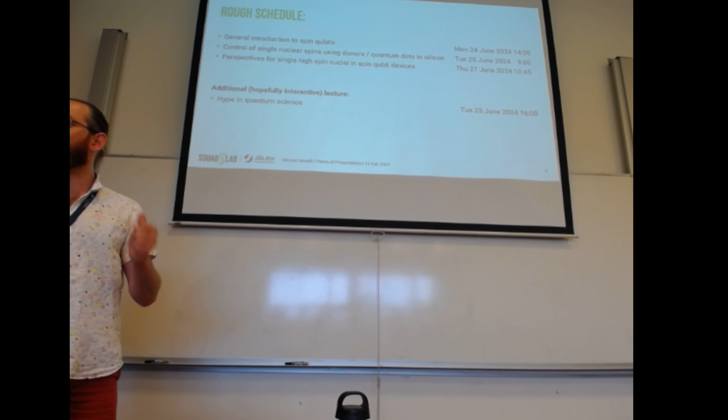The topic is the sequel of what Sergei Frolov showed you before from the experimental perspective. I want to talk more about the hype aspect and how that can generate potentially unreliable scientific papers, what that means for our community, and what we can do to improve our practices. Of course, I don't know all the truths either, so it's really a discussion where I set the stage. It's the last talk of the day, so it won't be very technical, more meant to discuss our practices.

Having said all that, let's start. This is derived from a block of lectures in the master's course at RWTH Aachen, taught for many years by Thomas Schäpers, an experimental professor in Jülich and Aachen. I started co-teaching this course with him last year, and I think this is a good deck of slides to talk about spin qubits. Any questions, interrupt and ask. This is supposed to be fairly basic, so I hope that you all can follow.

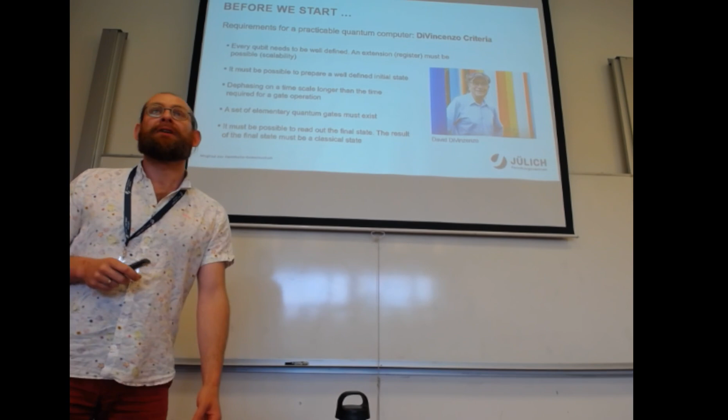So to start, David is actually one of my current bosses until he retires later this year. I'm sure that if you work with qubits, you have heard of the DiVincenzo criteria. It is basically an essay-style paper where he lists a number of criteria that any working quantum computer should obey. It's fairly generic, not very mathematical. You need a well-defined qubit. You need to make many of these qubits. You need to be able to initialize such a qubit. Then it needs to stay coherent on a time scale much longer than it takes you to operate on the qubit.

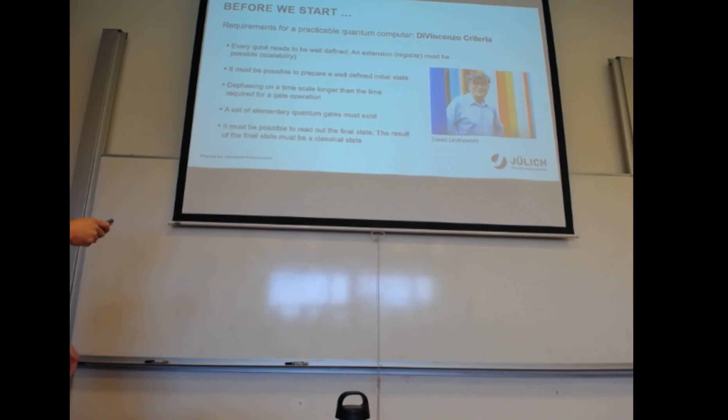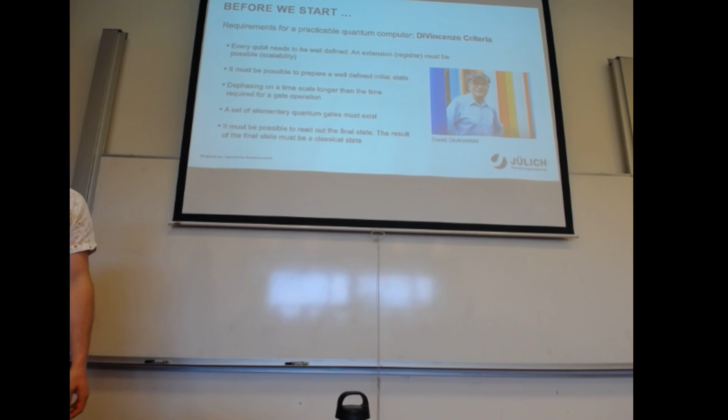Of course, you need to be able to define those operations, so not only initialization, but also changing the state in a controlled manner, and readout. In practice, I would say that readout and initialization is almost the same thing in many instances. So, yeah. I think from today's perspective, this is a very easy to understand and logical set of criteria that we need. But back in the late 90s, I think this was quite eye-opening to many people to see this spelled out.

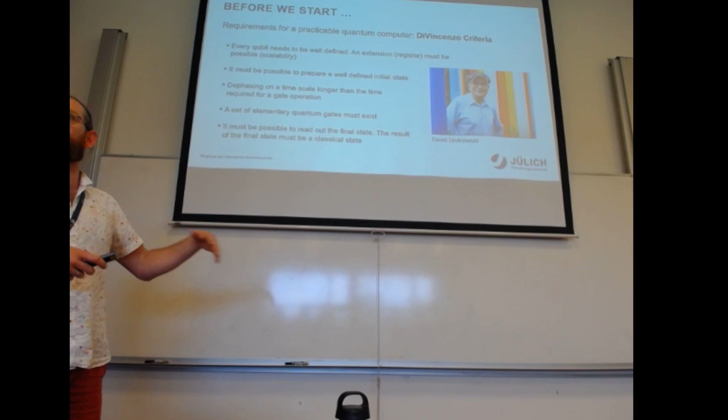And the point of the presentation today is basically to go through how a spin qubit works and see how we meet each one of these criteria. I won't make it explicit, but it should be quite clear, I think, throughout. All right? So, spin qubits.

It all starts, I would say, I will follow the history of the field a little bit, and that means we need to start talking about semiconductor heterostructures. Because spin qubits really originate from material science in the 60s, 70s, 80s, etc. And then in the 90s, this was perfected to the point you could make spin qubits from it in the early 2000s.

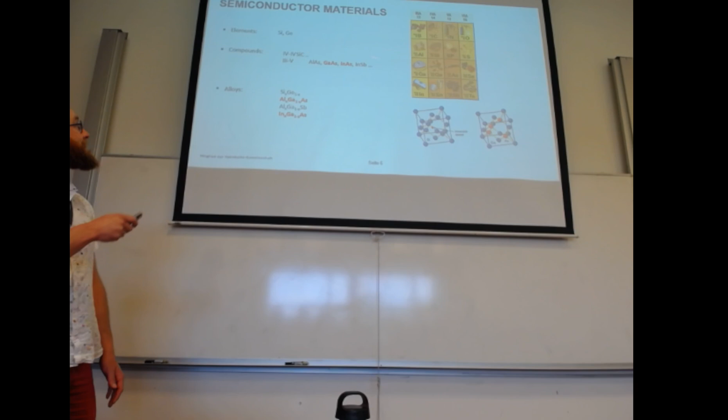So if we look at the periodic table, we're going to look for semiconducting materials where we can use the typical framework of gates, dielectrics, etc. to make gate-defined electrically controllable devices. What are the most attractive candidates for that? Of course, we have the group 4 elements, silicon and germanium. Very well known in the semiconducting industry. Also very attractive candidate systems for spin qubits. Nowadays, these are the leading materials and alloys of it.

Back in the days, it was actually not at all this platform where spin qubits were developed. Instead, it was from compounds and mixtures of that, namely aluminium gallium arsenide and gallium arsenide. So III-Vs. III-Vs have historically been a very important platform for spin qubits. Nowadays, I would say it's slowly phasing out. I can already tell you the reasons. It's nuclear spins in the material that you cannot get rid of. I will talk a little bit more about it later on.

What is the criteria for the elements to be a platform for the... I will hopefully answer it in a few slides, but mostly practical constraints. Is the material available? Can you grow it? And then can you fabricate electric devices on top of it that allow you to control the density in the material? Okay, so there's no criteria for the intrinsic properties?

No, not really. By now, for example, we know that you don't want a material that has nuclear spins that you cannot get rid of. But that is not a truly fundamental criterion. It limits your performance at some stage, but it's totally possible to work in a material with nuclear spins.

So this is not a fully comprehensive list. I am expecting that in 1 or 2 years there will be a spin qubit in graphene. Graphene is not so scalable, so it may not be the most useful, but we will get it. There have been spin qubits in carbon nanotubes. Any semiconductor you can shape into an electronic device and control the density of, in principle, suffices.

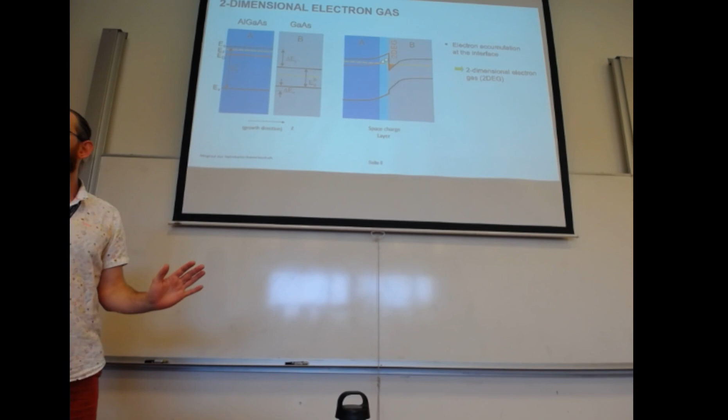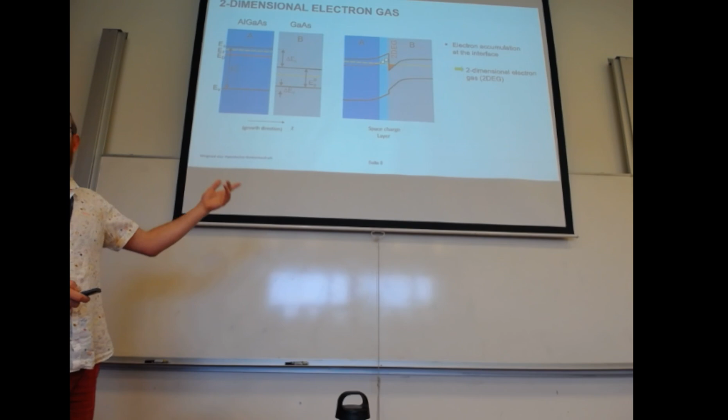This material system has been extremely important in condensed matter physics. It was developed in the 1980s to the point where you could make nice quantum transport devices out of it, and many major discoveries have been made based on this material platform. New discoveries in quantum Hall effect, quantum point contacts, etc. But also the first spin qubits were made in this material platform. It took another 15 years almost, early 2000s, before people could make spin qubits in this material. So many of the results I will show throughout the talk are based on this material platform.

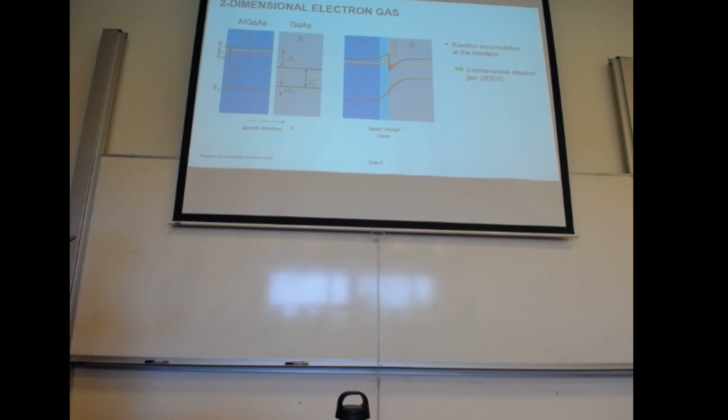One of the major tweaks that people had to do was put a remote dopant layer, and that's sort of like a lot of material optimization and investigations went on here. And this resulted in the end that if you look at the bulk of gallium arsenide versus this, called a two-dimensional electron gas because it's in a two-dimensional plane, you can see that as this material was optimized and improved, people were able to get very high mobilities.

So mobility basically means here that these electrons behave fairly ballistic. Mean free paths are of the order of micrometers, and that is important because now you enter the lithographic scales that were getting more and more accessible in the late 80s, 90s. Okay? So this is now two-dimensional. So we have basically gone from 3 dimensions to 2 dimensions, but we need to end up with a 0-dimensional object, a fully confined electron.

Yeah? Sorry, why is high mobility important when I'm doing a qubit? Because when I'm doing a qubit, the electron should rest. So what we need is to be able to have a well-defined, phase-coherent standing wave within our confinement potential. That is what you need from the material, and that you get through getting a high mobility. Basically, low mobility means that your electron is scattering all the time, that it's hard to get a properly confined standing wave within your confinement potential.

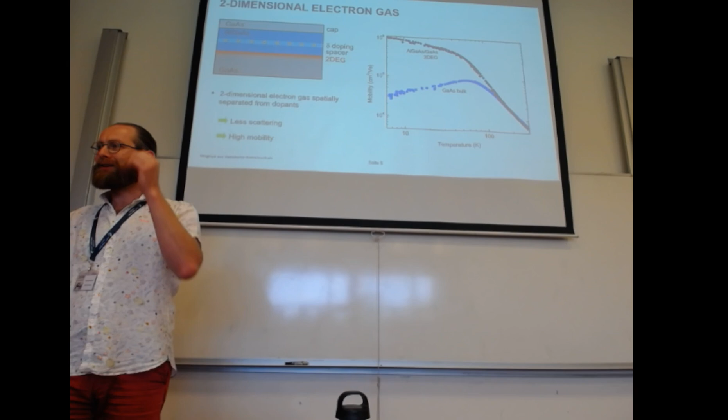This was a major problem with silicon for a long time. It was basically too disordered, too low mobility. So from an experimental viewpoint, we equate in our minds low mobility with very disordered, and high mobility with not so disordered, where you can have phase-coherent physics going on. So this was why this mobility had to be pushed to the level of at least 10 to the 5 or so before people could start confining electrons to the point you can see quantum effects.

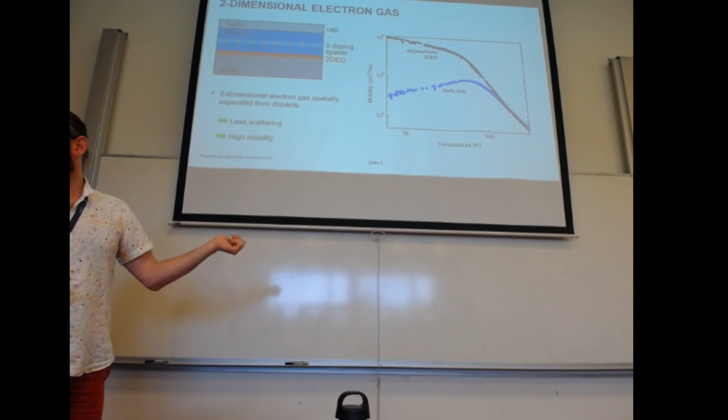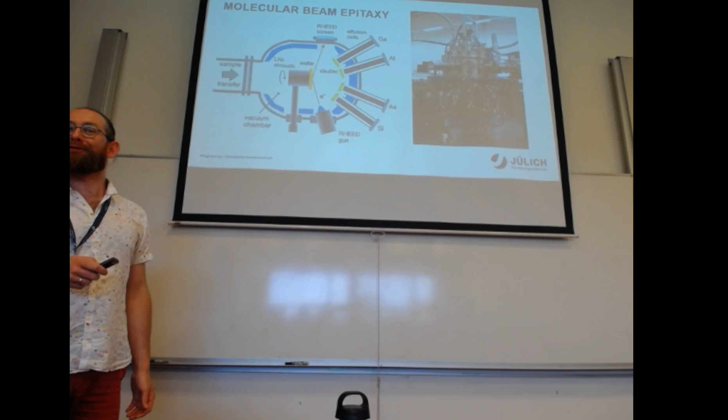Yeah. It's a big material problem, I would say. We're looking here at decades of materials research. Very impressive what material growers actually have achieved. This material, aluminium gallium arsenide, is made in MBE systems, molecular beam epitaxy. I'm no expert on that. I'm a device physicist, so I don't know all the ins and outs myself either, but you can see these are very complex chambers with several sources. You have analysis tools on there, often heating or cooling depending on the type of material. This needs to be ultra high vacuum, and this takes typically years of optimization for a lab to get it to the point where they can produce high quality materials.

And that is in our community how we often operate. There is an institute or a group that can make the perfect material for our purposes, and then teams like my own, people like myself, collaborate with the growers to make electronic devices out of that. So we ask them for material, sometimes we give input on how exactly they should grow the layer stack, etc. All right.

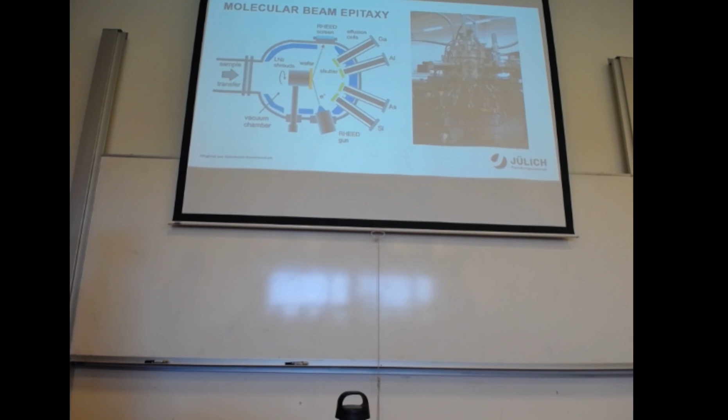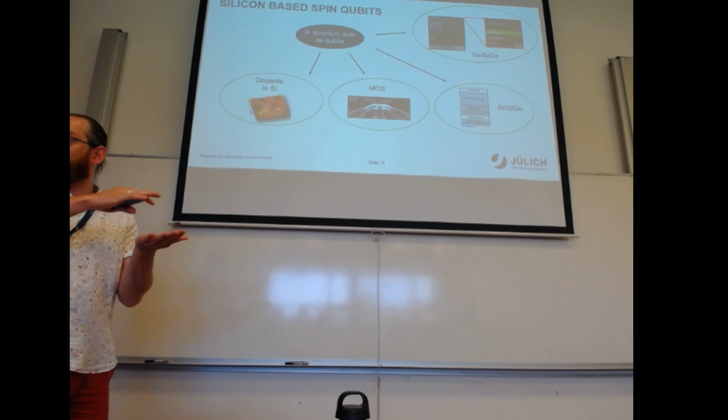And I will talk about it at the end, there are of course by now alternatives, to the point that gallium arsenide has been phased out, mostly for spin qubit research. Still some things are being tried there, but by now it's mostly overtaken by silicon-based materials that can either be bulk silicon with dopants in it, where you use the single dopant as a spin qubit. It can be really transistor-like objects, so metal oxide semiconductor type structures on top of the silicon, and you work at the silicon-silicon oxide interface.

Or, and it's probably the leading contender at the moment, having another heterostructure where you use an alloy of silicon germanium, and in between it you have this very strained silicon quantum well. So you start from a regular silicon substrate, you have a buffer layer, and you end with, in this case quite deep, a thin 10, 50 nanometer thick silicon layer that is now strained because there's germanium mixed in the silicon above and below it. The lattice constant is slightly changed, and the silicon here is now strained, and that is a way to crank up the mobility a lot actually, and also remove degeneracies in the band structure. I will come to that at the end.

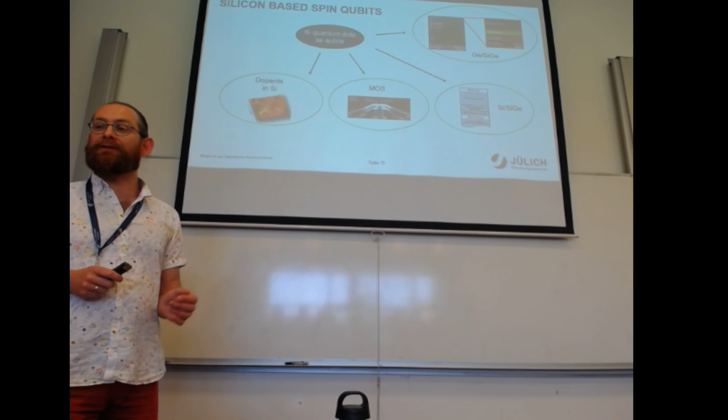The counterpart has been popular for the last 4 or 5 years or so. That is using germanium. So instead of high concentration of silicon, you have now a high concentration of germanium. You use a pure strained germanium quantum well. That is a hole conductor, so we work in the valence band here. I would say the experimental progress in the last 5 years is quite impressive, and that is the main platform we work on in my own team.

All right? This just as a pretext. The main workhorse structure or device that we need to talk about and consider is the quantum dot in a semiconductor.

So the way this works is we already, through material growth and by working at interfaces, etc., we manage to confine our electrons from 3D to 2D and basically engineer their properties to the point that they become more suitable for this type of research. But that's not enough. We want full confinement, where we have really created a particle-in-the-box-like state where only a single electron or a countable number of electrons can be present.

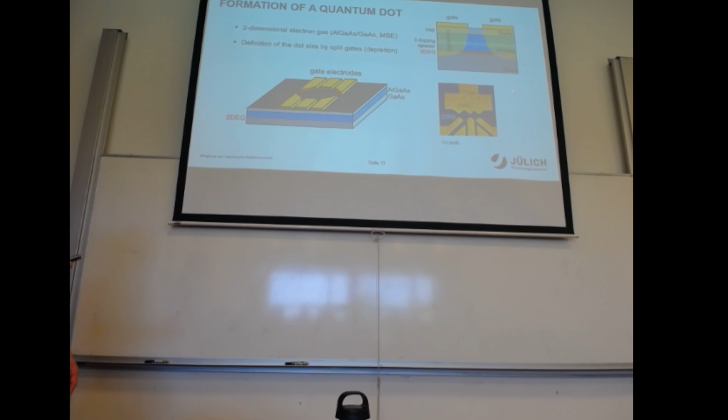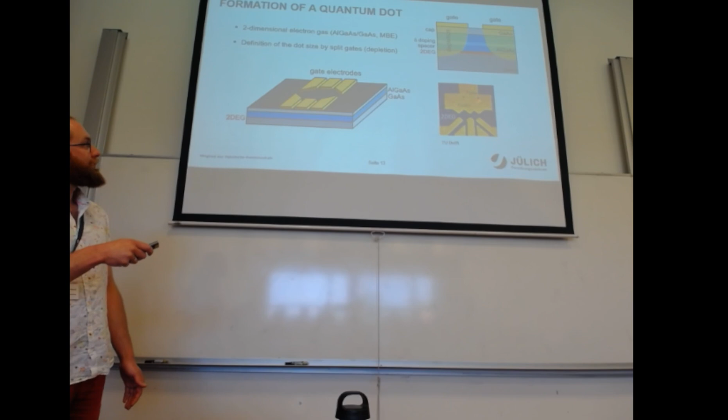In this case, they worked through depletion, meaning that through the design of the material, the two-dimensional electron gas is already present at 0 gate voltage, and instead you need to push it away where you put the gates. So you can see that in all the area here where there is no gate, you can have electrons, and underneath the gold gates here there are no electrons. So here you are putting a negative voltage on all these gates to push electrons away, and this is your confinement. Right?

And this is another example from Japan, from NTT. Similar idea. Also in the depletion mode.

Okay. Now, what have we generated here? And that is, I would say, a surprisingly effective, almost classical model, and it is looking at the charging energy of a tiny capacitor. And for much of the work we do in spin qubit land, this is pretty much the only model you need to work with, with small corrections for quantum effects.

So, schematically, we have a source and a drain, to talk in transistor language, so we have charge reservoirs here, and in the middle we have a small puddle. That of course is a small metallic-like island with a capacitance. Now, the capacitance of this island, we can calculate that, and it comes with an energy, and that is what we call the charging energy.

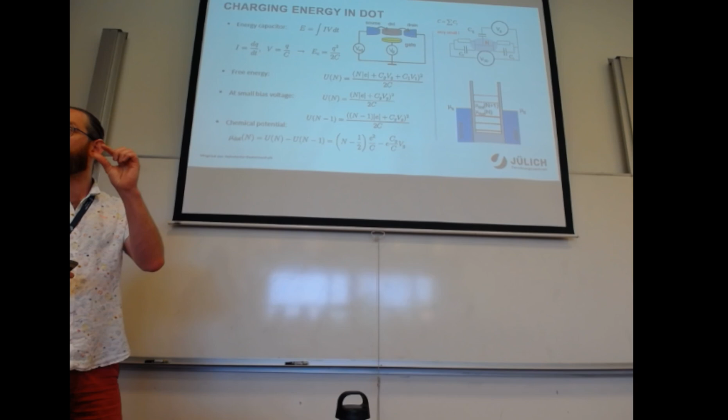Okay? So, very basic derivation, and we end up with the charge on the island squared divided by the capacitance. And the point is that when you make this island very small, the capacitance gets very small as well, and because it's in the denominator, the charging energy gets large. And it turns out that with the lithographic techniques that are available, you end up with an energy scale that is visible in the laboratory. And this is all classical, of course.

The other important aspect to understand is that this leads to a discretization already in the available energy states of this island. This is all classical, there's no quantum in here. And the reason is that every time you put an extra electron on this small island, you need to pay this charging energy, and once this is more than the thermal energy of your system, you will have only a discrete range of energy states available for your island.

So in terms of chemical potential, which is the typical thing we work with in the laboratory, because we can adjust the voltage difference across the device. What this means is that for the various different states, this is basic math, taking these capacitors in the circuit into account, we can define an arbitrary number n of states, and then the difference between two of these states is the chemical potential of the island, or the dot. And then you get, again, this expression in there that contains the charging energy.

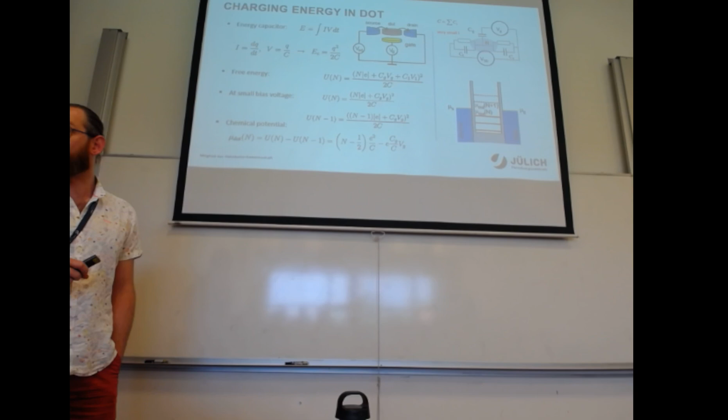So what this means is that we have a ladder of possible chemical potential states now of the island. And every time one sits in between the source and drain chemical potential, we can have transport through the device, but when there is no level in between, we are blocked. So from a device operational perspective, this is something you can observe.

Okay? So, if you now look at the difference in chemical potential between two of these states, you will find that there is the charging energy in there. Okay? So it all is about making the island small enough compared to the effective temperature of your system so that this quantity becomes observable.

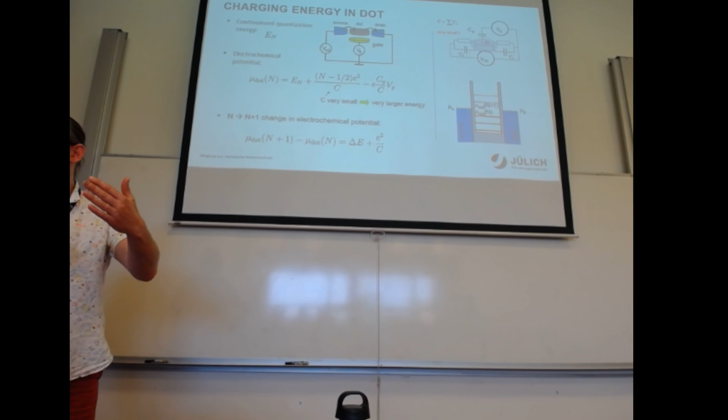And that is why you need the lithography to be of good enough quality and your system to be cold enough so that you can observe this. And that has been achieved for the first time in metallic islands, I would say in the late 80s, early 90s, people have seen this effect for the first time. Metallic islands, and now this had to be translated to semiconductors, and that took basically another 10, 15 years for people to develop that.

Alright, I already mentioned that. Now in terms of transport through this structure, we can observe single electron tunneling now. So we have a position like this, where there is no available state on the island chemical potentials in between the bias window you apply to the structure. So then we don't have any current. Then there is a level in between those two chemical potentials, the source and the drain. We can actually have current, and we observe a current peak. And then if you pull this ladder up or down, again, you are blocked again.

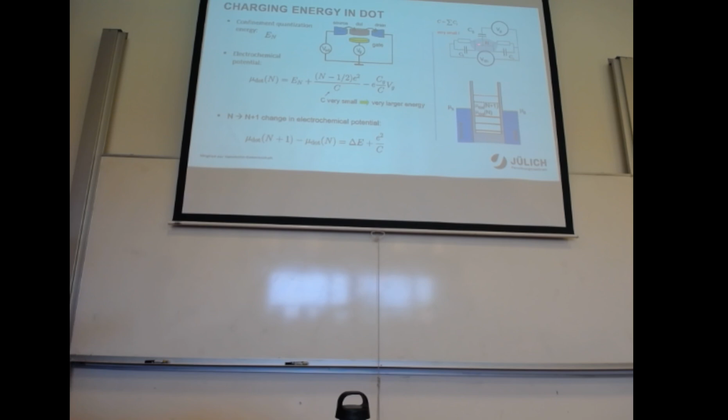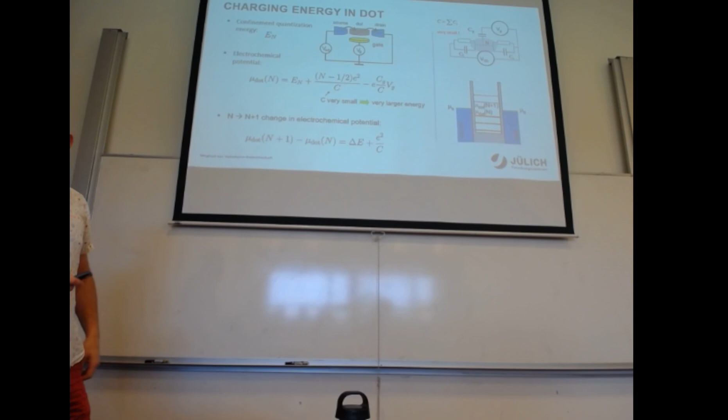This, of course, we can control with the gate. If you saw in all these formulas here, there is the gate voltage via the capacitance that we have. So the gate voltage is in there. So we have continuous control over the ladder of chemical potentials on the dot, and every time we are on resonance with, or we are in between the chemical potential difference between source and drain, we can have transport. So this is gate controlled.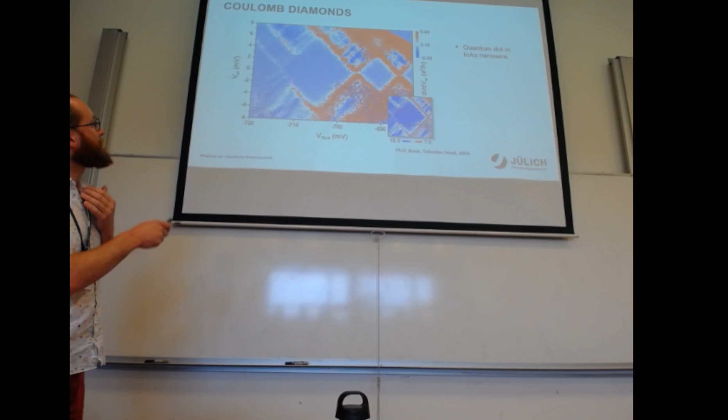Okay? So for an experimentalist, when you see that your diamonds have a changing size, it means that you have a changing orbital energy in a quantum dot. So once you start seeing that, it is a good indication your system is no longer a classical island, but it has become quantum.

All right, so now let's think a little bit, given that we can make one of these small islands in a semiconductor, that we have control over the number of electrons in there. Then, of course, you can map this onto the DiVincenzo criteria, and that is what Daniel Loss and David DiVincenzo did in 1998. They gave a blueprint to us as a community of how a spin-based quantum computer would look. The idea is that you have individual quantum dots on which you define a qubit. The qubit is defined on the spin of a single electron.

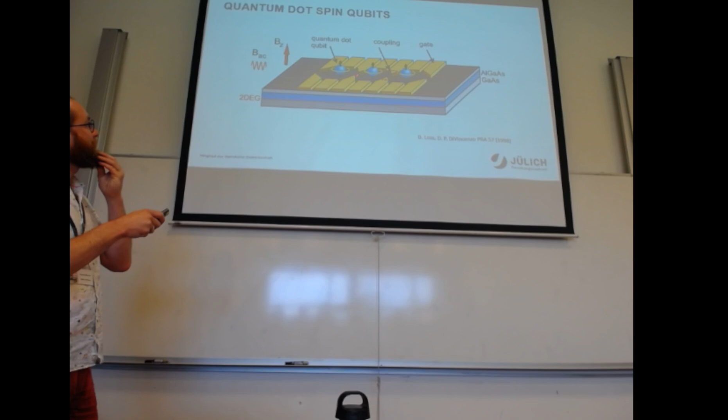For that you need to apply some magnetic field to define the spin state, lift the spin degeneracy. Then there are gates in between that can turn on and off coupling between the spin qubits so that you can have conditional effects. Control goes, of course, via spin resonance techniques. I will talk about that later. So we can apply microwave pulses to control the spins, and we do that all in one of these two-dimensional structures. So this was one of the earliest blueprints of a spin-based quantum computer.

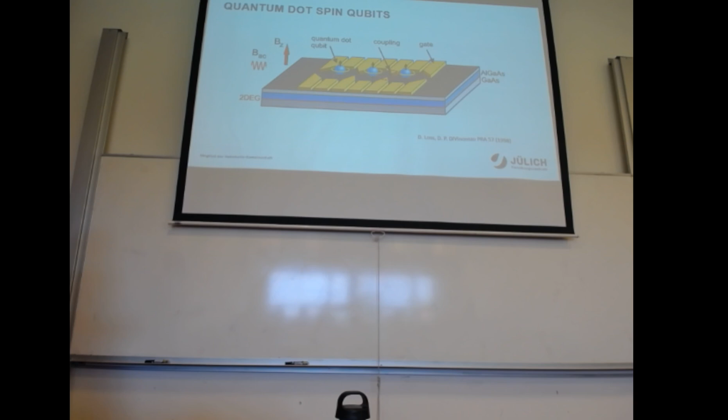But funnily enough, at the very end I will show an example where, after all these years, more than 25 years, people are at the level of this schematic, maybe double the size of it. That is where the field is at. So, how does that work? How do we define our spin qubit? First of all, we need to have a single electron in the quantum dot, or at least a single uniquely defined orbital state.

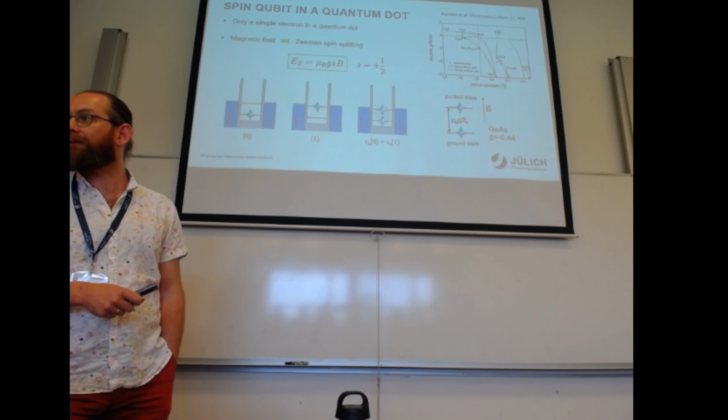The orbital state is spin degenerate, so we need to do something to lift the spin degeneracy, and that is, of course, the Zeeman effect. So for a normal spin-1/2 type system, we apply a magnetic field and we get the Zeeman energy out of it. Then depending on the various materials, you get an effective g-factor. For gallium arsenide, that happens to be minus 0.44. This is a renormalization of the free space g-factor that comes from the effective band structure approximation for these types of materials. We get an effective mass and we get an effective g-factor out of that.

Okay? So here we have now a quantum mechanical two-level system and we can call it a qubit. We have spin up, which we call 0, spin down, which we call 1. And in principle, if we can somehow control this, we can have superpositions and we can have a qubit. But that's the concept at the very basic level.

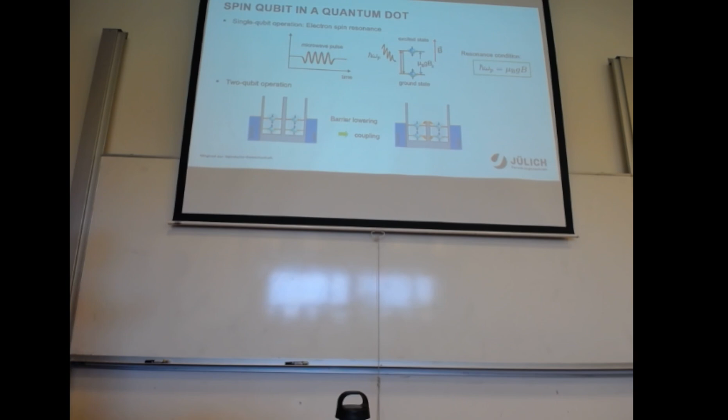Now, operation goes via electron spin resonance. So we apply a microwave pulse with a frequency that matches this energy difference. When we do that, we can flip the spin. So this allows us control. And by doing that in a timed manner, by making it a pulse, not a continuous field, we can control how much we flip the spin, how much we rotate it.

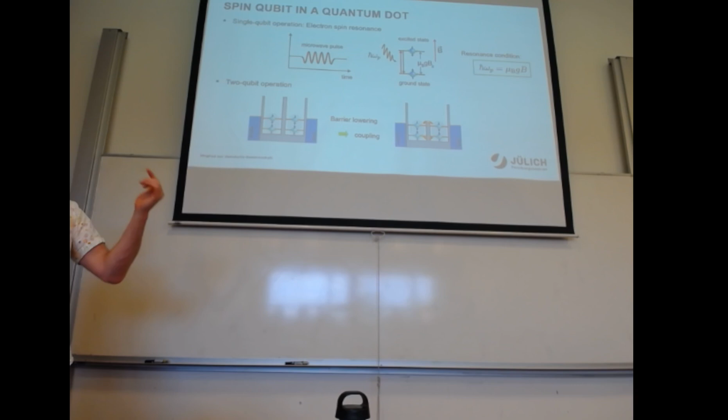Then in terms of two-qubit operation, if we have two of these quantum dots next to each other, and we have an extra gate in between that can control how much these two wave functions overlap, that is what allows us to do a two-qubit operation, a conditional gate.

Because the moment we lower this barrier and the wave functions overlap a little bit, we get coupling terms between the two qubits. By turning that on and off, etc., we can implement conditional gates.

Yeah? Could you tell a little bit more details how you control this microwave? Yeah, it will come in a few more slides. I'm just giving you the overview now, and then I will fill this in a bit. Okay? So just be a bit more patient. Thank you.

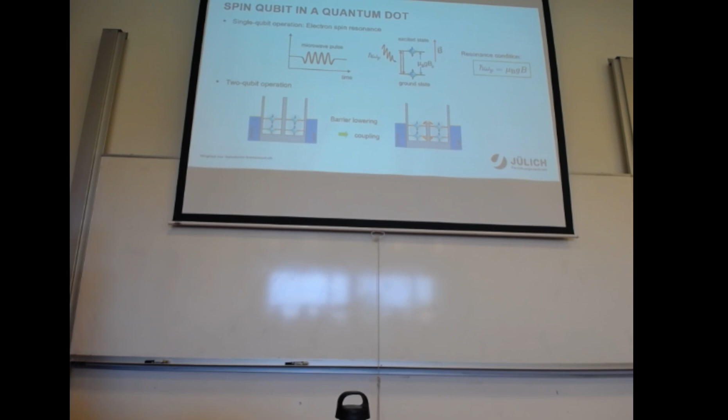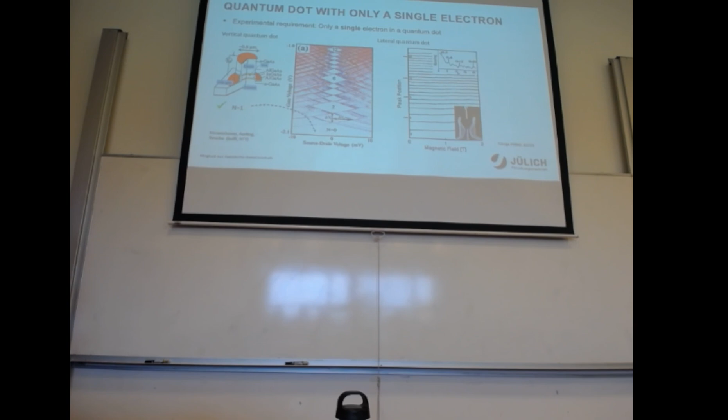Then we can also look at Zeeman splitting in these quantum dots. So this is, I think, the first observation, but you can see that that is now done in gallium arsenide, so in a planar structure where we can actually make electronic devices out of it. So here is our quantum dot. People are monitoring the transport through the quantum dot, and here we plot conductance again.

And what you can see is that this is the top of a diamond here. And what you can see is that this line here is slowly splitting. Okay, so you go from 6 Tesla to 10 Tesla to 14 Tesla, and this splitting here is growing. This you can fit to the effective g-factor, and you find more or less the gallium arsenide g-factor. Okay, so that is what is happening here.

So this shows that Zeeman energy is there, it is measurable. Gallium arsenide, of course, has a very small g-factor, so you need to apply really sizable magnetic fields to be able to see it. So, yeah, this tells you that you can make the system that you want to have to make a spin qubit out of it.

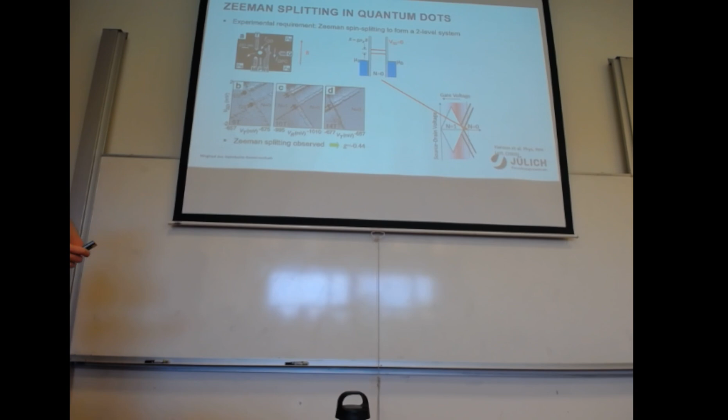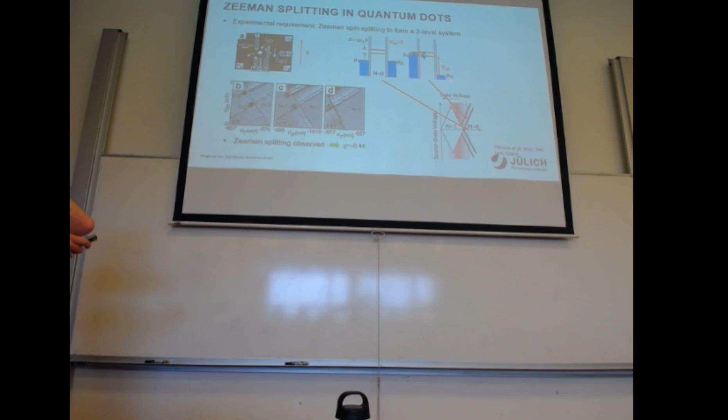All right, sorry, I should have shown this before, this is a diagram that belongs to it. Yeah, so at this point now here, you have only one of the two levels within your bias window, so you have some current, and then when you put the bias window a bit higher, you have both of them contributing, and that is why you get this extra step in this extra conductance line here. Okay, and here you are blockaded. Right?

So this is a way you can in principle make a spin qubit. Now we need to be able to read this out, that we're actually doing it. Like this is all done time-averaged DC transport, right? Like you see a static splitting. So for that, we need two things.

We need charge detection to work. So real time, as you go, charge detection, and you need to be able to convert spin to charge. Measuring spin, a single spin directly in experiment is very, very difficult. Measuring a single charge, as you could see from these measurements earlier, is possible. We can do that.

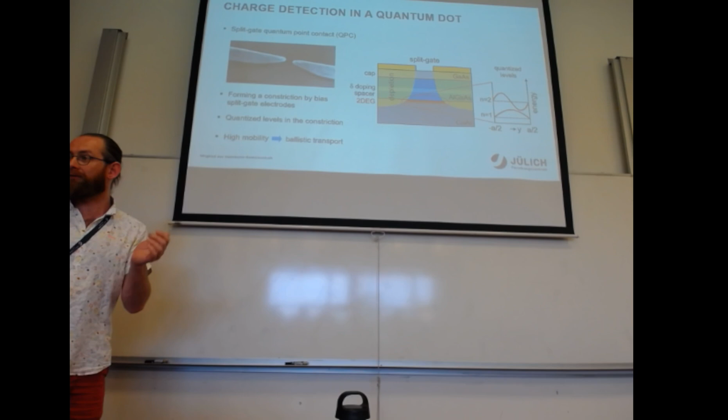So, how this was done: first, any structure that has a nonlinear conductance as a function of the electrostatics around it can do the job. So traditionally this was done by making a QPC right next to a quantum dot. So on top of the two-dimensional electron gas, you not only make your dot, but you also make this type of constriction that allows you to make a quantum point contact.

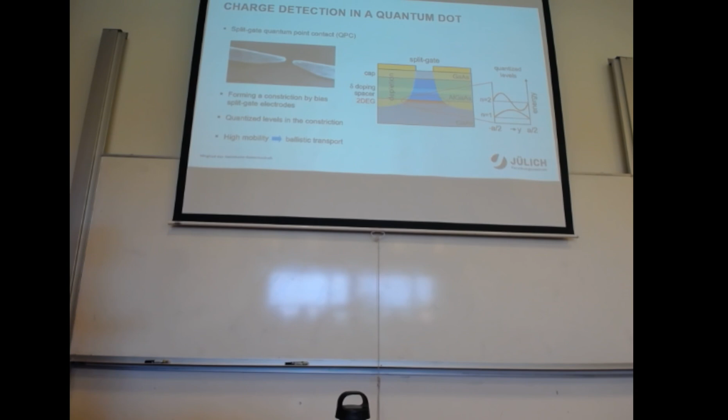So yeah, that gives you quantized levels in this constriction, and I don't know if you need to go through this. Have you seen point contacts? Yeah? So then you know the concept. We have quantized conductance now, and the idea is, of course, that this is a highly nonlinear IV. In the ideal case, it is like steps. In reality, it is, of course, smoother.

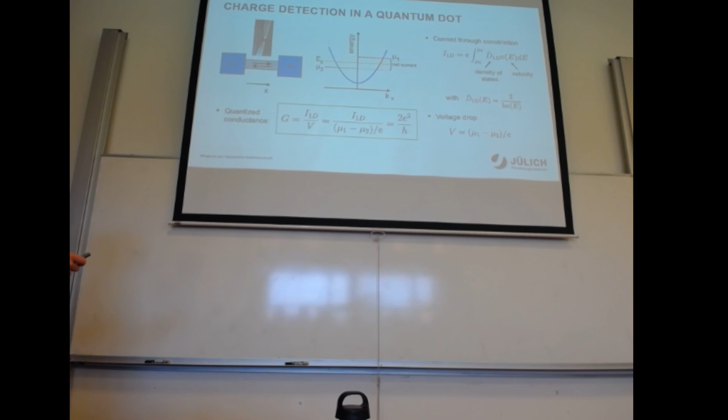But as you sweep a gate and the bias voltage, you can access more channels in the QPC. So what you do is you work somewhere on the steep slope. That is where you tune your QPC, and you have it sit right next to a dot. Now here, the charge on the quantum dot will actually affect where you sit on this curve. You can view it as an additional gate potential to the QPC.

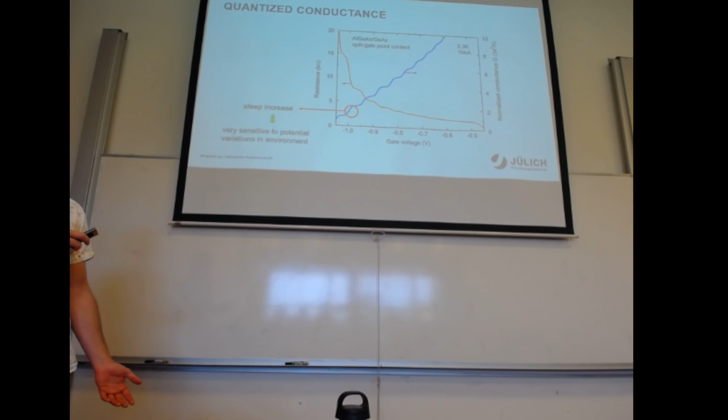Okay, so the dot needs to be capacitively coupled to the QPC. If that is the case, then it means you are moving back and forth a little bit on this axis, which means if you sit on a steep section here, you can actually measure a change in current. And this is really quite sensitive to the level of single charges.

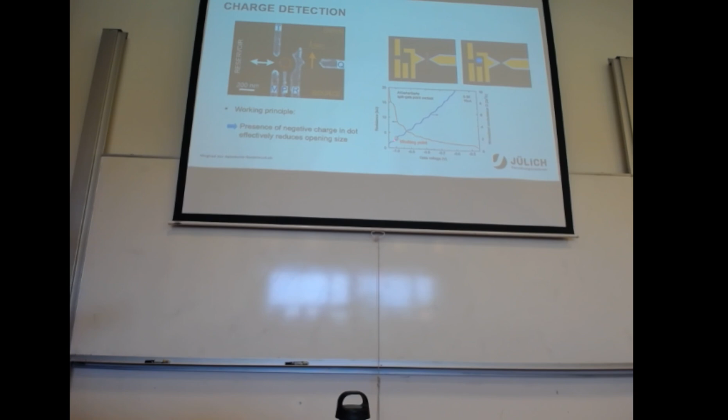All right, so this is how such a device looks. You have your quantum dot here, and right next to it, you have your QPC. So it is a bigger structure. It's a smoother wire construction. You pass current through it from here to here. It's tuned up to the point that you have a QPC. And you operate it over here. Okay?

And now you look at differences in the differential conductance of the QPC. So you're going to keep monitoring either the current or the differential conductance of the QPC. Now, this depends on how many electrons are present here. If there are more or less electrons sitting on the dot, it will affect the current through the QPC.

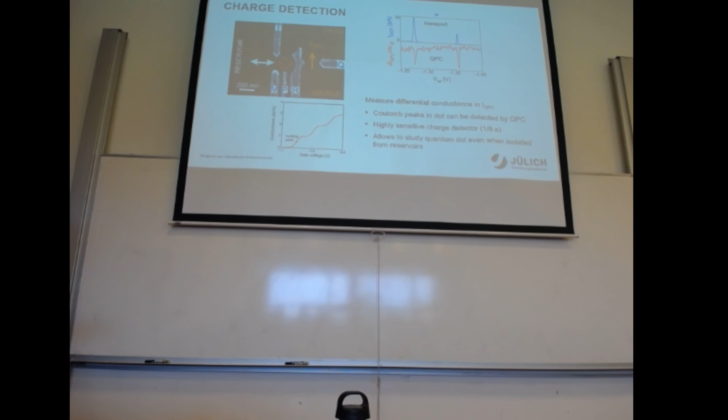So, here is the idea: whenever you are sitting in a well-defined spin state, nothing will change over time. You have a fixed occupation of 1 in the dot. It could be an arbitrary number, but your occupation is fixed. So now, when we do an operation, it could be a spin flip, or we play with a gate, so that first we sit below a reservoir, now we sit above it, the charge can tunnel out. We will have this step over time of the charge occupation of the dot.

So in this particular example, we have a characteristic tunnel time of this barrier. So once we put an electron in, we put it above. Within a certain tunnel time, it will tunnel out. And then after another one of these tunnel times, it will tunnel back in. Yeah? So the sensing is sensitive to the occupation of the dot, but not to the transition of the charge.

So, it's about the capacitance of the dot? In this scheme, yes. But your question is a good one. It is also possible to sense changes in capacitance. But for the purpose of what I want to present, we can think about static charge. So sensing a change in the static charge between two different situations through the capacitive coupling. It is definitely possible also to measure moving charge. You monitor that, but it's a slightly different readout scheme.

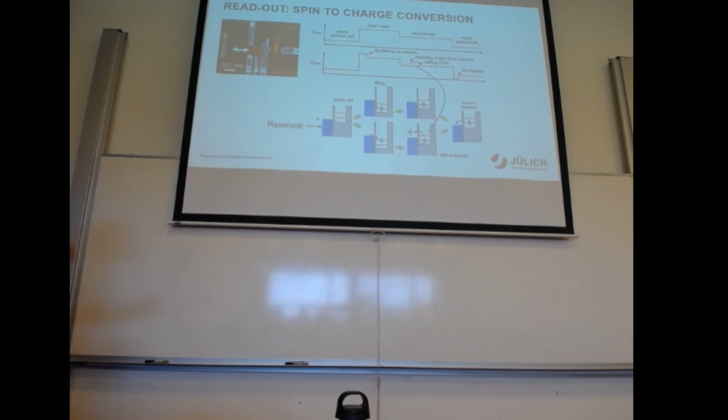The point is that this step here tells you if you had spin up or spin down. Once you have the system characterized, you know through the value of current here if you had spin up or spin down that you loaded onto the electron, or the excited state spin down has decayed inside the dot to spin up. Okay. So this is what we call spin to charge conversion.

Yeah, this was the first time that anybody was able to measure the tunneling of a single spin state out of a quantum dot. Okay, so it is really this sequence that I just showed you that was performed here. Fill the dot with an unknown electron species, and then do readout, and the readout blip tells you what you loaded onto the dot. Okay?

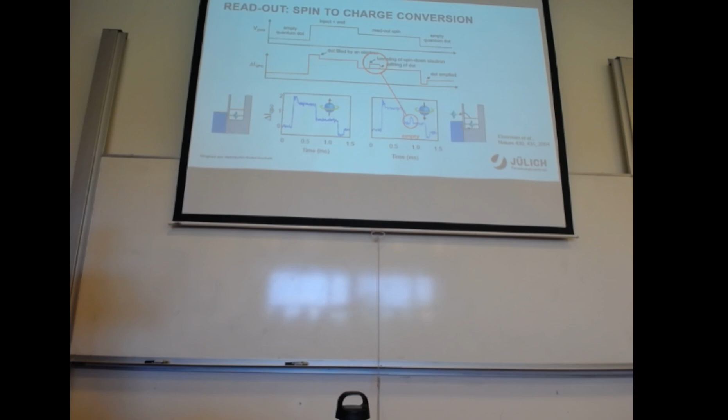Now, this wait time here, you can use that to estimate how long it takes for the electron to decay. If you measure very fast, the chances that any decay mechanism has kicked in is low, so you are providing a more true measurement of what you initially loaded. The longer you wait, the higher the chances the electron has relaxed to the ground state. Okay? And that is exactly what is measured here, so this is spin relaxation time.

So this is decaying from the excited energy state to the ground state of the dot, and that is as a function of wait time before you perform the readout while the electron is sitting idle on the dot of an unknown but defined spin species, and that gives you a handle on what we call the T1 time. So this is the energy decay of the spin qubit. Okay, and that is quite long, it's in the millisecond range, and basically compared to the operation speeds, this was an important result at the time, telling you that this is good enough to move on to quantum computing, basically.

What about T2? Yeah, we will get to that in a bit. Of course, in gallium arsenide, T2 was absolutely horrible. It was like 10 nanoseconds or so, because of all the nuclear spins.

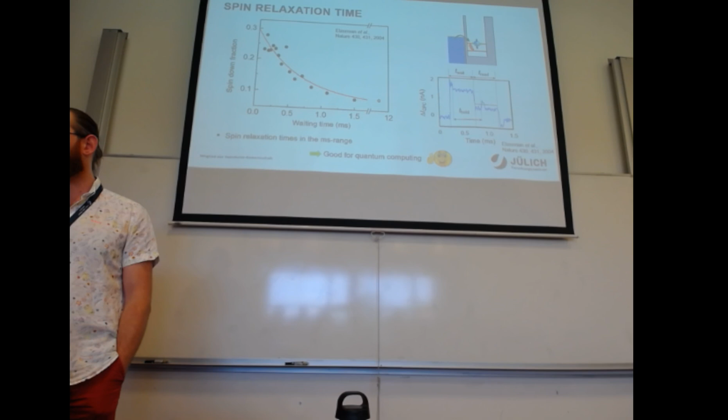So, during this readout procedure, we shift the levels of the system. Does it influence the T1 and T2 time? I think that in the end, once you have done the best you can in terms of material design, etc., to make the system as quiet as possible from the perspective of a spin, what will limit you is the quality of your pulses, how sharp these are, how ideal these are. That is what is going to, in the end, limit the performance of your spin qubit.

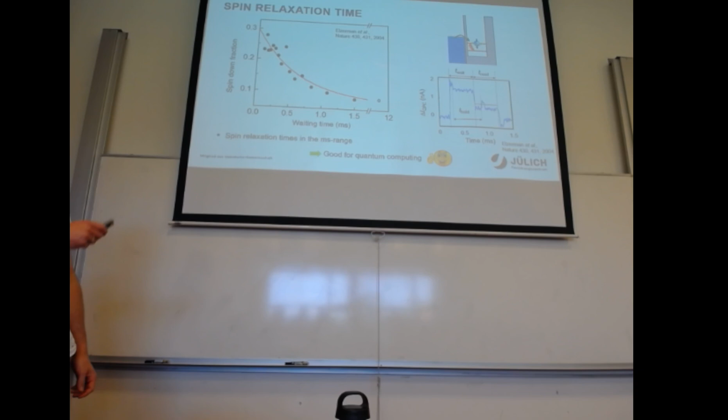I think that in these early generation experiments, it was probably not so important. But nowadays, pulse engineering, etc., is a big topic, to do this in the most optimal way to avoid effects on the performance of the qubit, yes. So in principle, yes.

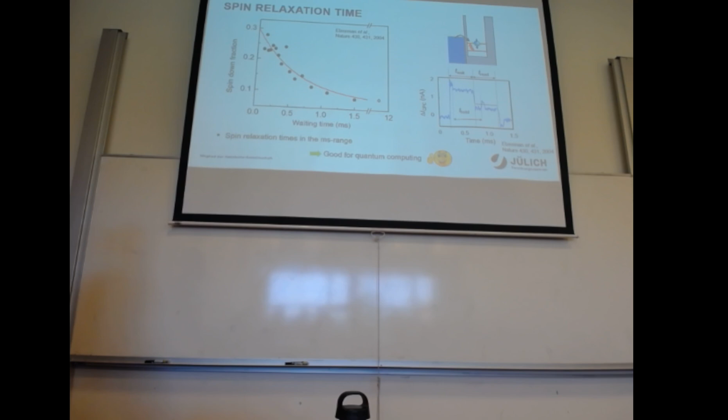Maybe we take a break, 5 minutes or so. Is that a good idea? Yeah, I think this is a good point. So we reconvene in 5 minutes.